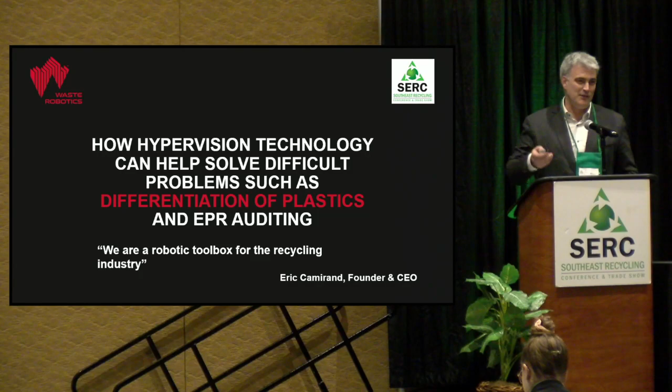Good morning, everybody. Thank you for being here. Thank you for having us here. This is great. So how do you get invited to talk at a conference? You make a 5-line title with buzzwords in it, and then you get invited. So joke aside, I think we're going to talk about important things. There's a saying that was said a long time ago by this English philosopher that knowledge is power. Sir Francis Bacon. I used this slide in a show in UK, and I thought everybody would go like, 'Yeah, this is great,' but nobody knew who he was.

So, but anyway, the quote is valuable to us. I think that's what we're talking about here. Shortly about us, we're in the business to bring robotic picking. We like to get the conversation around effective picking. We'll talk more about how robots bring efficiency and value into the recycling industry. So that's what we do every day. We're out of Canada, so the funny accent is out of Montreal. There's 25 of us completely passionate about developing technologies that are going to bring real difference to this industry. Old people, young people, just people having fun and making great products. We're out there to resolve large issues.

Everybody's motivated. We have several partners. We consider our clients partners. We like to have a relationship that is really close to them, because in the end, the robots are kind of a part of the family. It's a working tool there that is being installed and it can evolve. Fanuc is the robot company that we use. It's out of Japan. It's the most sophisticated robotic company with the biggest service network worldwide, and it's the toughest robot. That's a very important part of what we do. And we have financiers, we have clients, we have people that just are with us, supporting us, and we're glad to have them, and we're all in this together to try to do cool things with technologies.

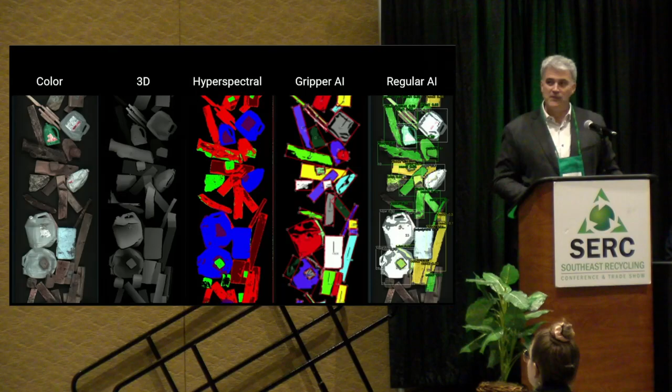Gripper AI, I'll talk to that a lot. That's also part of the equation. If you're sorting, you need to pick. And if you need to pick, you need to grip properly. If you're not gripping, you're not doing anything. You can do all that fancy AI stuff, but what we call gripper AI is the intelligence of actually going and capturing products on the belt. Regular AI, what's most of us in the industry are doing, is identifying an object, putting a little square around it, and that's what we do. But gripper AI, we'll talk more about that.

Sorry, there's some slide formatting issues, but it doesn't matter. There's a significant issue in packaging changing all the time. This packaging, well, this one is the worst we've seen. Every other month, this guy is changing his plastic for his lid. So how do you figure this out? There's no way. You can tell me whatever you want about AI, it's not doable. I myself can't know. Actually, I have to flip it and use my glasses to see the little logo to figure out what's going on with this.

So if you can have the greatest AI in the world, these two lids are not going to be sorted with AI, only if we really have hyperspectral that we can see. Same with these containers—they're flipping back and forth all the time, it's really hard to keep up. Your AI needs to be retrained all the time, it's limiting. And what about these crushed, white, dirty white plastics? You tell me this is going to be sorted at 99% with only AI? We don't believe it. We know it's very difficult.

So having that extra signal—for example, that lid, it's blue and red—so now we know what's going on the belt, and we go for it for real. So reading the chemistry of the product is really important. Not having it, you can have the fastest robot in the world, you're going to bind together PP and HDPE, so for whatever that's worth, that's still mixed plastic.

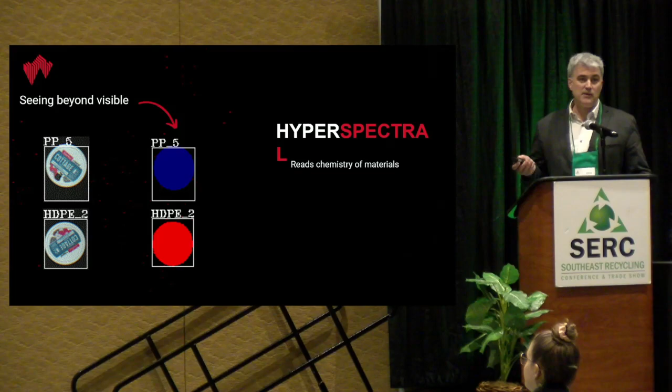So what does hyperspectral bring? Well, quality of sorting. We know about the history of sorting before we're shipping it out, and quality was so-so, but now we want to keep it domestic. We want to bring as much quality as possible, so obviously quality means higher bale value, higher recovery. So higher recovery also—being able to see what's going on the belt, figuring out what you're going after, it's very important, obviously resulting in landfill diversion and more money, more recovery, more money in your pocket.

So we talked about hyperspectral, that's great. So what is this? What is robotic sorting? You have four functions in robotic sorting: you need an eye, you need a brain, you need an arm, and you need a hand. So if you're missing one of these four, good luck, you're not going to sort anything. So having grippers is really important.

So what is gripper AI? It's like—I'm sorry, I'm going to use some accessories here. So you're trying to go for this thing here, this cup. With a gripper, if I'm going for it like this, there's a potential interference with this bottle because this bottle is higher, and if I'm coming full tilt, the robot doesn't see. So everybody understand? We have a scanner in front. We get this data, we try to figure out what's going on the belt, and then we dispatch orders to these blind robots. These robots are completely blind, they don't know what they're doing.

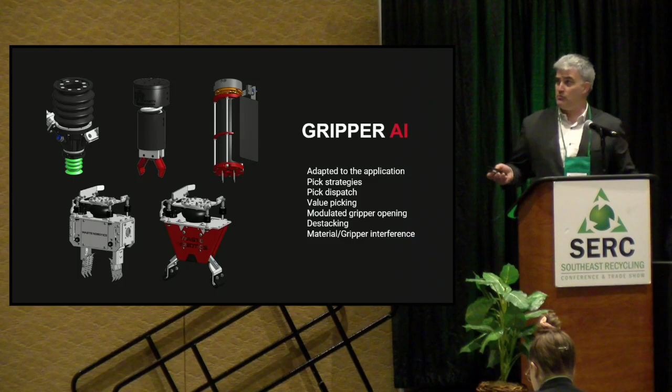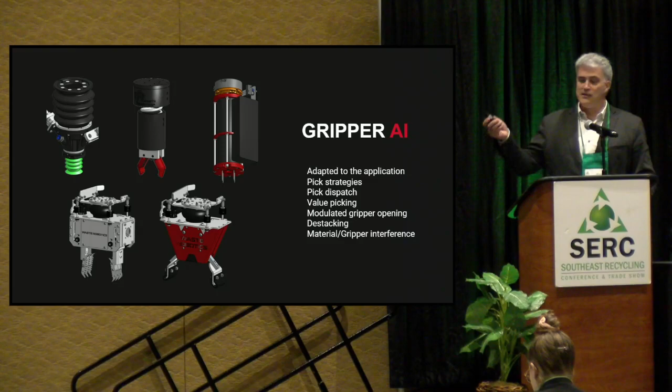Because the suction cup is the center of mass tool—you go for it, you hope for the best, and it's working great. But when you start to do more convoluted sorting, you need that sort of intelligence built in, and destacking—the ability actually to destack because the stuff is overlapping on one or the other. And having grippers that can do this, that can take a cinder block and flip it—you cannot do that with just suction systems. So the ability to actually maximize the performance, picking it on the right side, doing it properly, having gripping strength, having the ability to move large objects. C&D, it works—we only use that in C&D, not others.

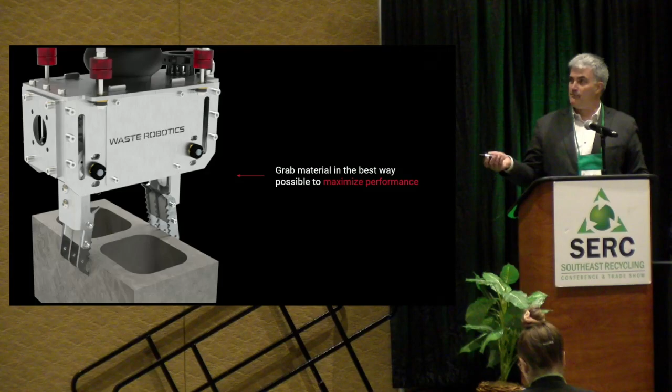Now, I want to bring the conversation to something else, like what we call effective pick. Because there's been a lot of talk about robots out there and what we can do, how many moves we can do, and all that jazz. But actually, we have something we call the robot validator—and I like saying that because it sounds like robot terminator.

So what do we do? We put a scanner there, and we scan for a while, and now we see your stream—we see it all, so we can tag it. Tagging is something most of us out there can do, it's now getting democratized. But now what do we want to do? So this is an example of a guy that has an aluminum stream after an eddy current. He's got contaminants in there, and he wants to get stuff removed to bring the quality of his aluminum up by picking stuff. And we established with the client that HDPE was probably one of the heavy fractions in that stream who should be first.

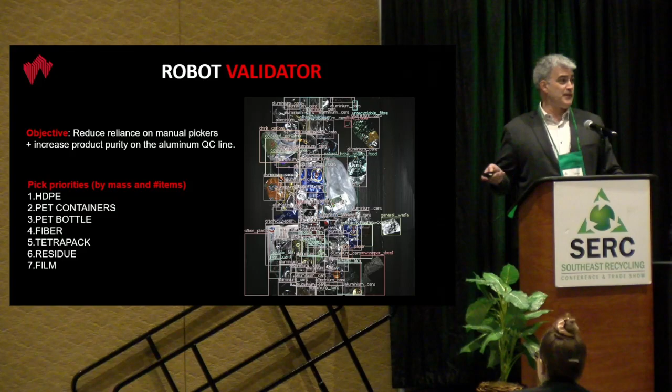So in order of priority, if we don't have time to do it all, let's do HDPE first, PET containers, PET bottle fiber, and so on. So the client said, if I'm going to remove things, I'm going to remove them in that order. Now, what do we do?

So we have collected real data from a real stream, identified all these boxes, and thrown this at our simulator. We have a simulator that simulates real robots, like this robot there. It does exactly the same thing in the simulator as in real life, so we simulate it all, and then we run it here.

So we collected 13 hours of material, like a full day. And this robot usually can do 32 picks per minute. That's an M10 from Fanuc. Anybody can go and buy it.

But now, after we run all these, we send picks. We send the first pick and it goes and drops in bin one, we send the second pick, and we simulate this all. This robot is, by design, 32 picks per minute. But the way the stream is showing and how the robot's actually busy doing other things, this robot will actually do 23 picks on average per minute, because that's how the material shows. Sometimes there's stuff to do, sometimes there's no stuff to do, sometimes there's too much stuff to do. That's the reality. So just throwing out picks per minute isn't right - these are effective picks.

And then we show this here with the client - this is all the aluminum on the belt, so we can see all the aluminum on the belt. The red stuff is what's going to go by. The green stuff is what we're going to capture. He put a magnet there, so we're going to capture the ferrous here. So we can show him, exactly, before we build anything, the efficiency of the system - that his stream is going to go from 78% to 85%.

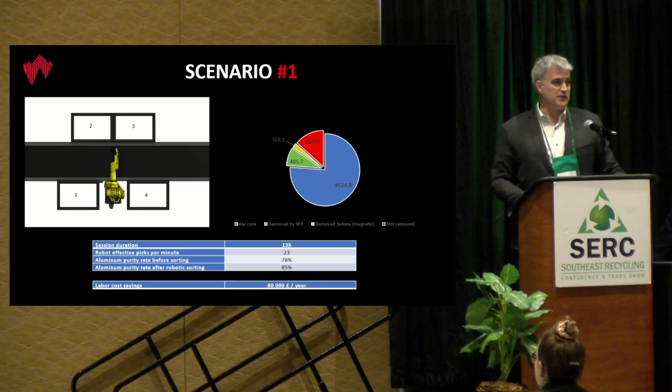Now, next scenario. So how do we do this? What could it look like? I hope this is going to start.

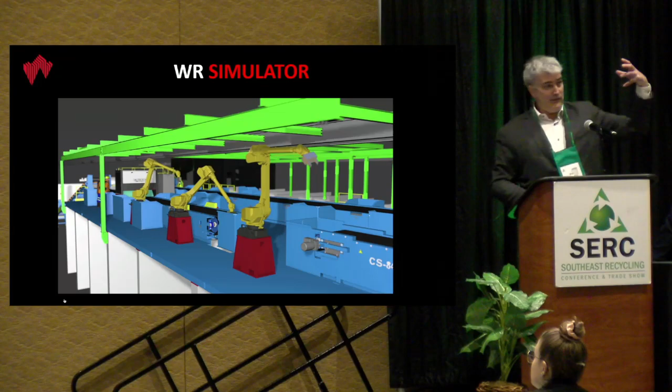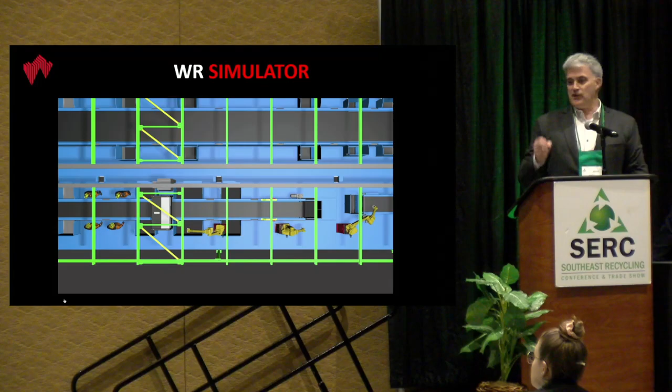So the simulator, we take real picks from real life and throw it on our simulator, but this is a different one. We calculate the real picks that are going to happen, because if I try to send 1 million picks to the first robot, it's only going to do what it's going to do. Some of them will go back, dispatch to the second robot, some to the third robot. So now we're really calculating, based on your real stream, what this thing is going to do.

And yeah, that's it - so then we run into scenario 2. So we take the same stream, and go like, what about we put 2 M10s, two fairly large robots that have toss-across capability, and then we run the scenario again. So now again, the same sample, 13 hours, we put 2 robots.

Now these 2 robots, as I told you, are supposed to do 30 picks per minute each. But through the simulator, we show that actually they're going to do 42 only. Doesn't matter - everybody says, hey, your robot is too slow, it's doing this, it's doing that. Now we can calculate value. So now he was at 78% on that simulation. Bringing these 2 robots is going to bring him to 91%. Actually, he was at 85, and now he's looking to bring it up to 91.

That has a lot of value for him selling his product downstream. So now he's starting to see value from the aluminum purity increase. It's worth 200 grand for him, plus the labor savings.

So actually, we also say, hey man, we're going to put more bins there, so that when we capture product and know what we've got in our hand - if it's HDPE, we're going to put it in the HDPE bin instead of doing this all-trash thing. So actually, you could sell additional products out of this. So now we have not yet determined the value of captured products, but anyway, his payback started to look really interesting with 2 robots.

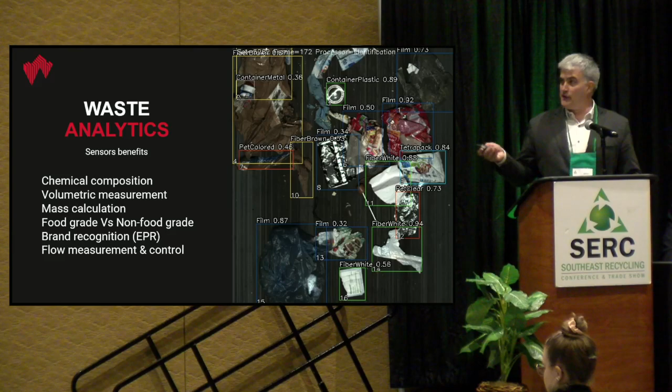So we put the scanner in, we see it all, and we start producing. The interesting thing is we use a 3D scanner, so we have volumetric information that we corroborate with mass, so we can do a full composition of what's on the belt in real time—calculating number of items, different types, volumetrically linked, overflow of belt, raising alarms for clients, what have you.

I think several of us are coming out with this kind of analytics, which will allow auditing and informing people designing EPR programs—now you can actually measure things. Not only that, but you can also use it as a benefit for process management in the plant. For us, it's kind of a side product, since we designed the scanner only to drive the robot, but all that data is there for us to harvest.

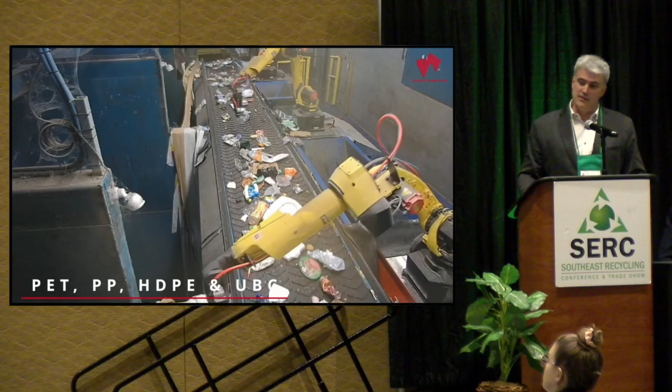Quickly, as I said, we're kind of a toolbox. We have different types of robots, different types of grippers, different types of sensors, used in real time. We use suction cups as well, depending on the application. We do tailored solutions—we don't have a canned product.

Every time we show up at a place there's something new—we do refuse lines, we do bag sorting. This thing can lift 50 pounds. We're doing bag sorting in France, in Dunkirk, at an incinerator, capturing the yellow bag which is full of recyclables. They use that to collect.

We do funky stuff like polystyrene spiking—we invented a spiker that spikes polystyrene, separating food-grade versus construction styrofoams, which helps the client create value. We also do C&D sorting of different types: positive, negative, wood, rocks, bricks, what have you.

So, hyperspectral robotics sorting—we believe it's a more expensive robot, but the value proposition is very strong, and the ROI varies depending on whether you're running one shift or two shifts. It will vary greatly, but on a two-shift system, most of these paybacks are under 2 years. That's what I had to say. Thank you.